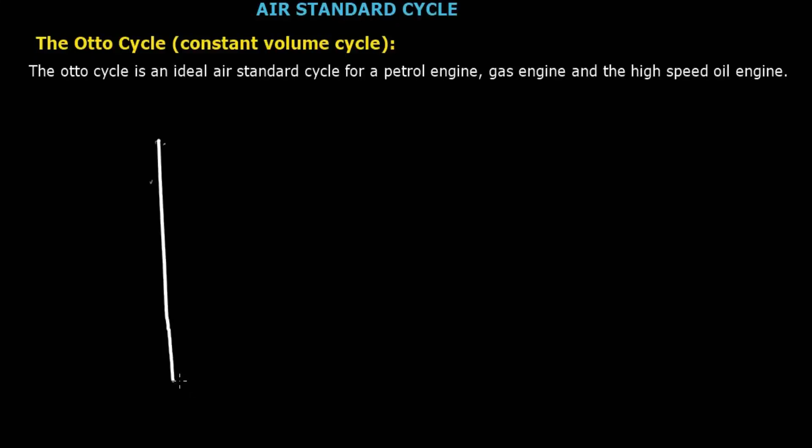And then we draw it this way too. So here is this way, this way, this way, and this way. So here trace it down, and here trace it down too. So this is a PV diagram.

So here is the first, second, third, fourth. So this is V2, which is equal to V3, and V1, which is equal to V4.

Okay, now let's list out the processes involved. So as you can see from the diagram, we have that process 1 to 2 is isentropic compression, okay, as a reversible adiabatic compression. So it's an adiabatic process.

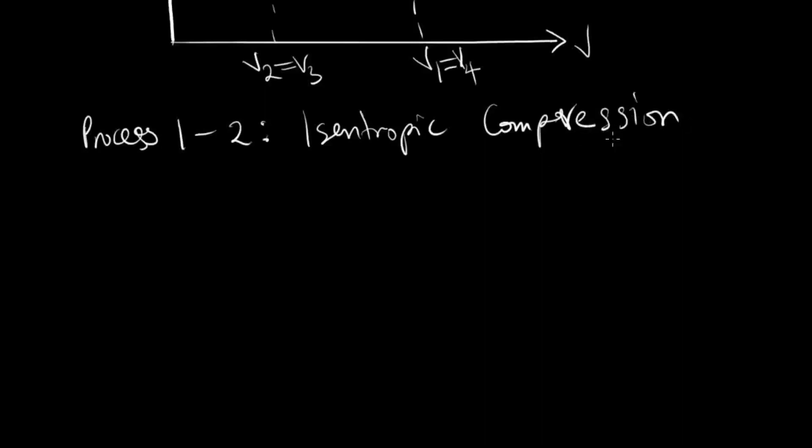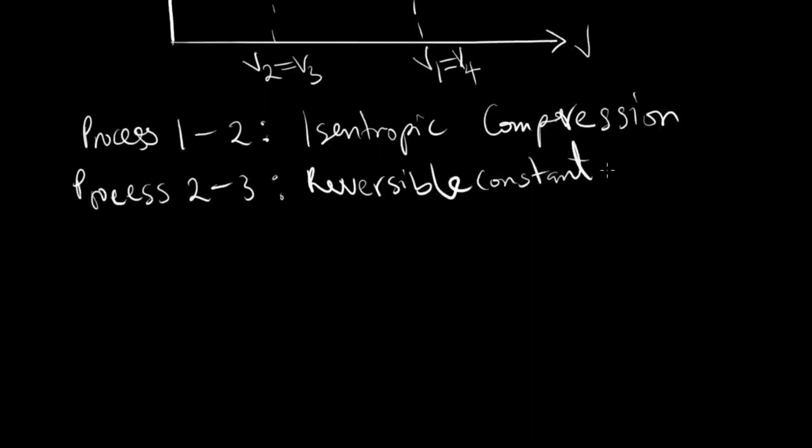So process 2 to 3 is none other than a reversible constant volume heat addition.

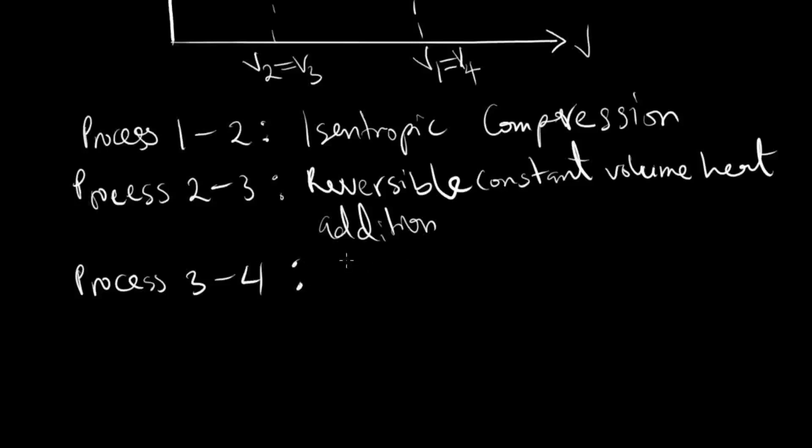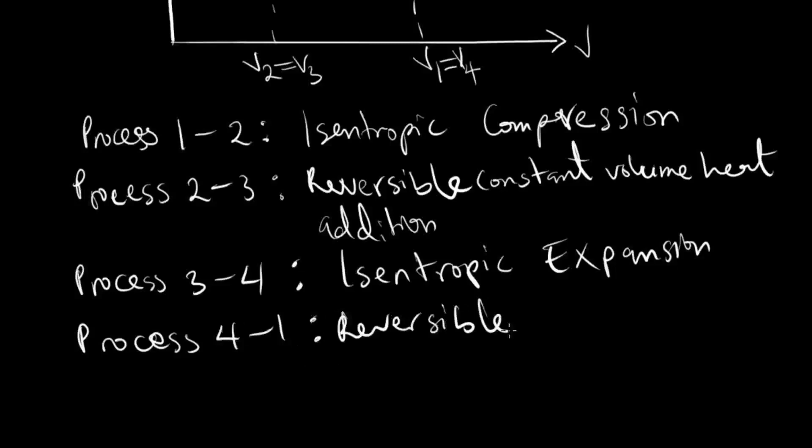So process 3 to 4 is isentropic expansion. Now process 4 to 1 is reversible constant volume heat rejection.

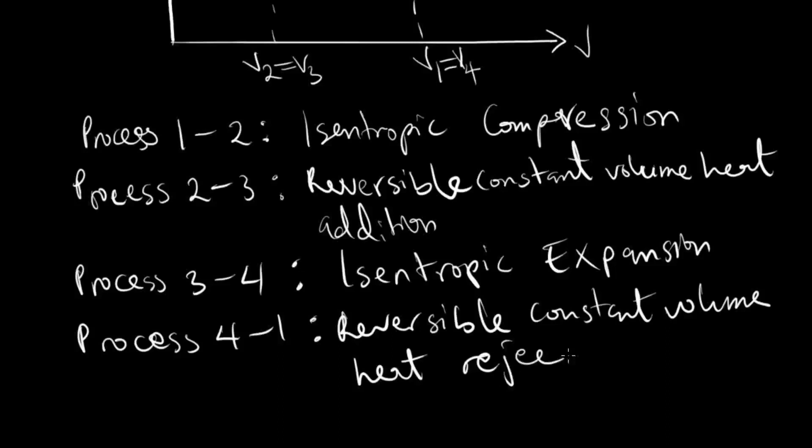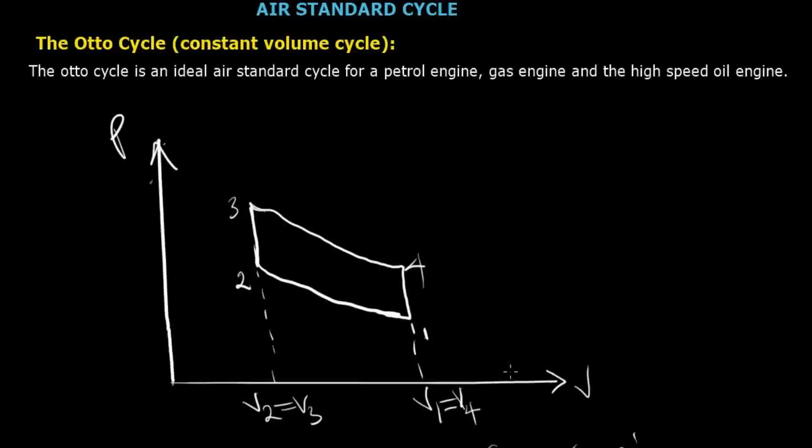Now we have listed out the processes involved in this diagram you can see over here. So these are the processes we are going to follow to be able to solve problems. And before the problems we are going to solve now, we would have to prove some formulas that will help us in finding a solution to some problems.

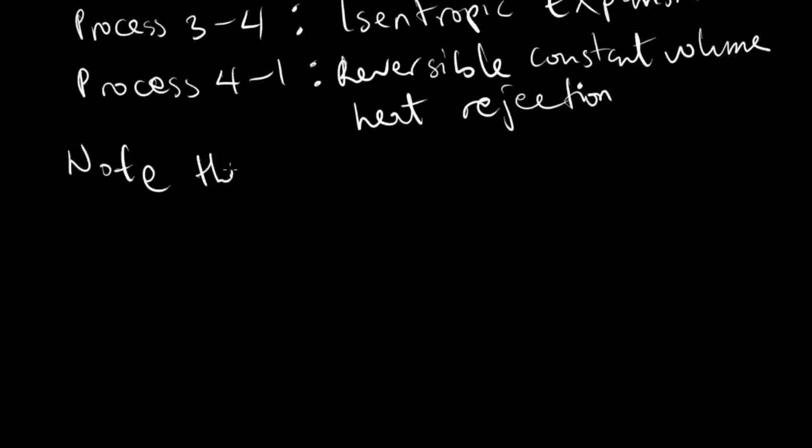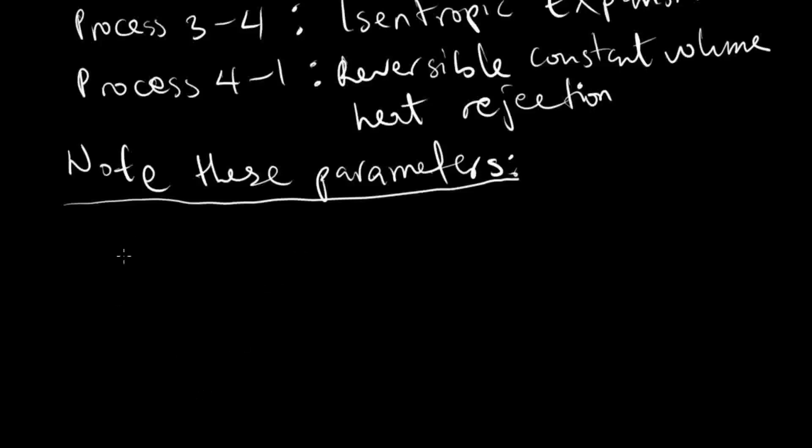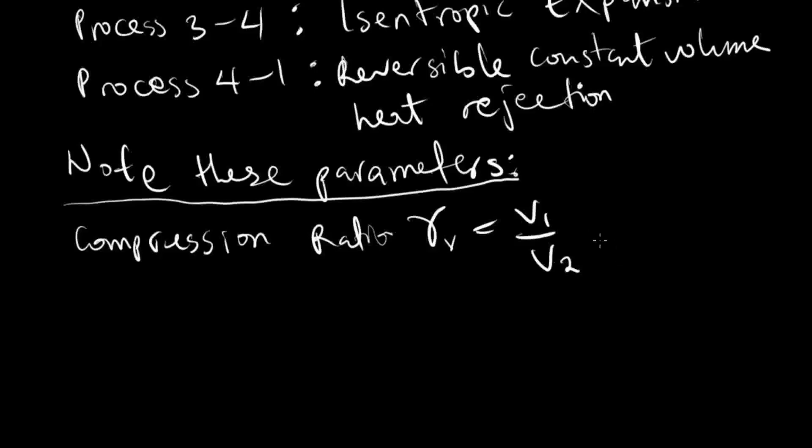So firstly, you have to note these parameters, which are compression ratio. Compression ratio is denoted by R subscript V, which is equal to V1 over V2, and it's the same thing as Vs plus Vc all over Vc, where Vs is swept volume, that's engine swept volume, and Vc is the clearance volume.

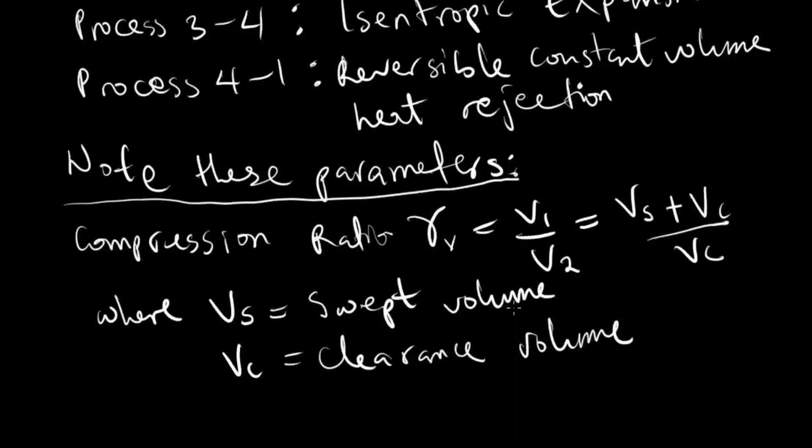Now Vs also, on the other hand, is given by pi d squared L over 4, where d is the cylinder bore, and L is the stroke.

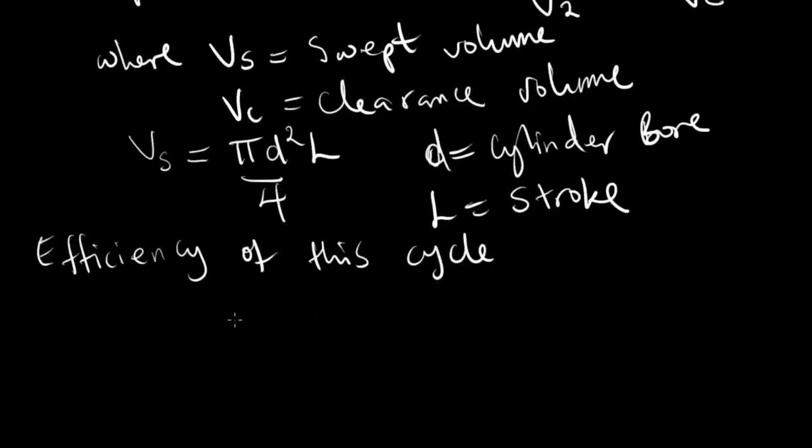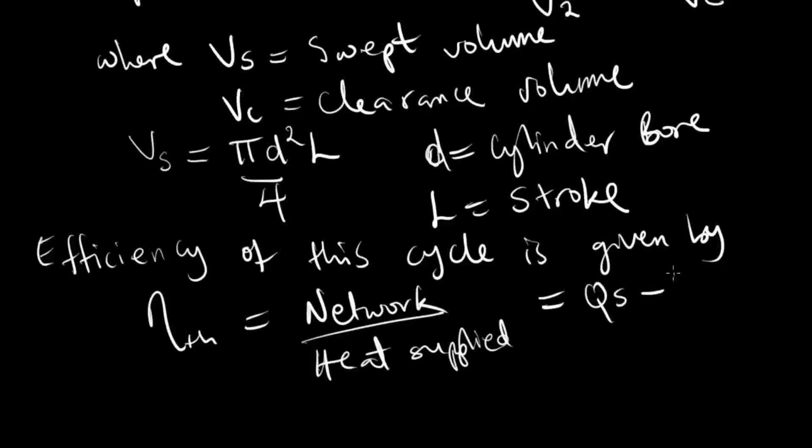Now the efficiency of an Otto cycle is given by the cycle thermal efficiency. Efficiency of this cycle is given by thermal efficiency is network over heat supplied, which is equal to Qs minus Ql over Qs.

Where Qs is the heat supplied, Ql is the heat rejected. Of course, the net work will be once you subtract the heat rejected from the heat supplied, whatever you get is your net work.

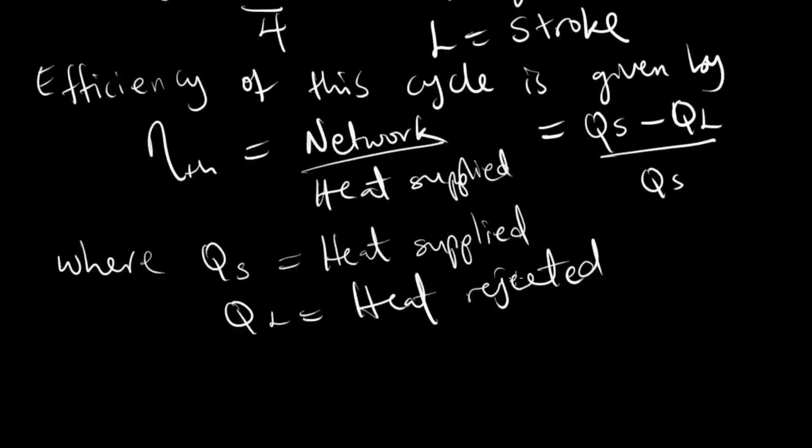So now, following the processes, you will have that heat supplied Qs is given by Cv. I think by now you should know the value of Cv and what Cv is, because we used it in the last video in the non-flow processes. We solved some problems with it, so in case you've forgotten, Cv is the specific heat at constant volume. Then Ql is Cv, T4 minus T1.

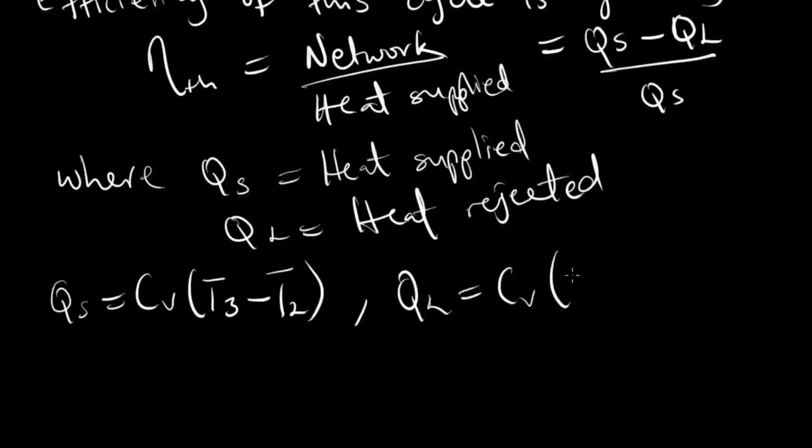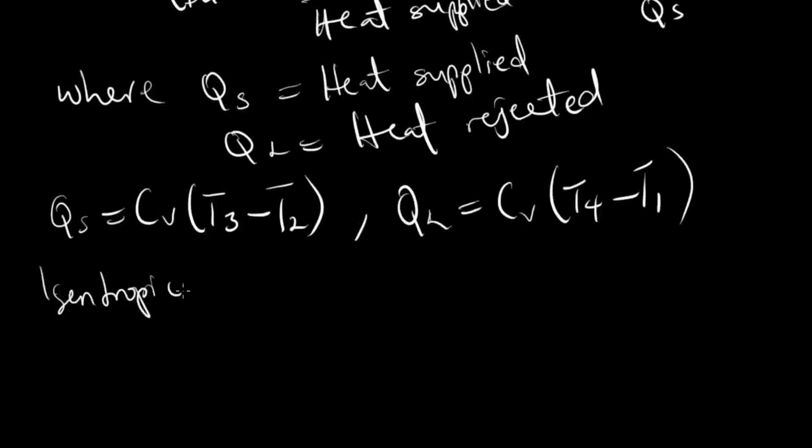Now for isentropic expansion, let's start with the compression. For isentropic compression, T2 over T1, of course, an isentropic process, equals V1 over V2 raised to power n minus 1.

Now for isentropic expansion, we have that T3, which is the maximum temperature, over T4 is equal to V4 over V3 raised to power n minus 1.

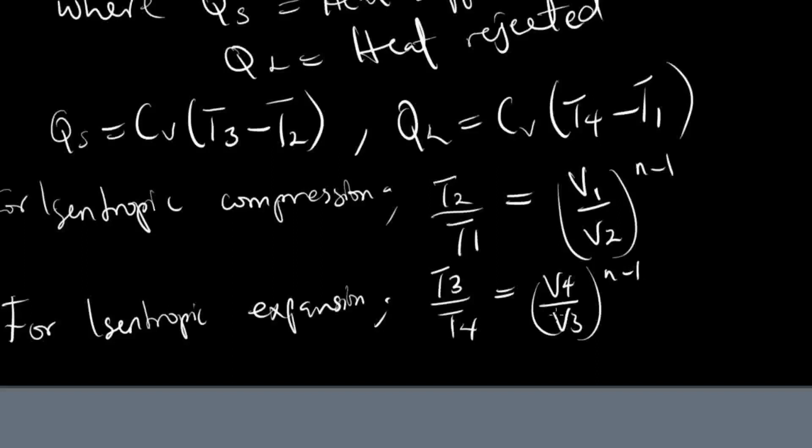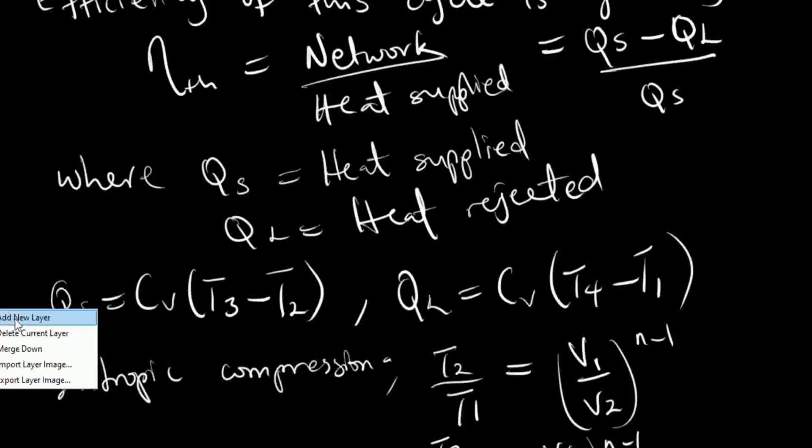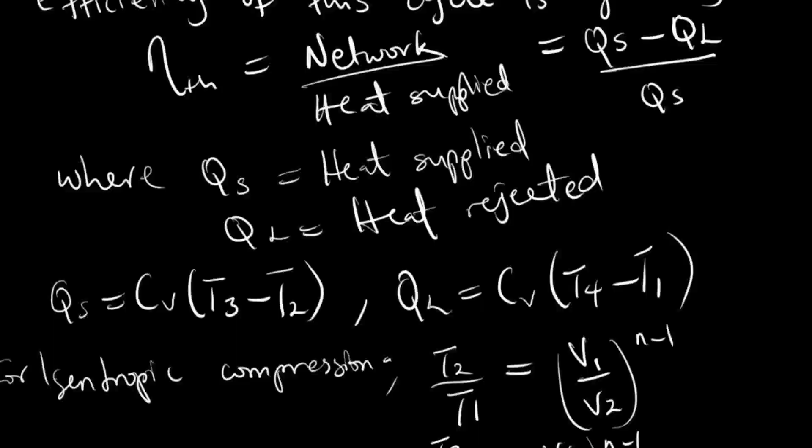So we have come to the end of the page, so we have to continue from this on another page. So I would go to another page. Now, but recall that from the diagram, let's go back to the diagram.

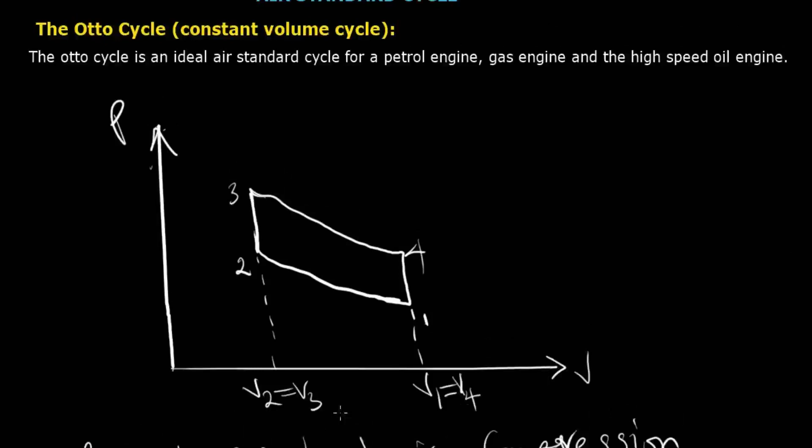So look at the diagram. V1 is equal to V4, okay, and V2 is equal to V3. So if we input that, if you play around with the formula,

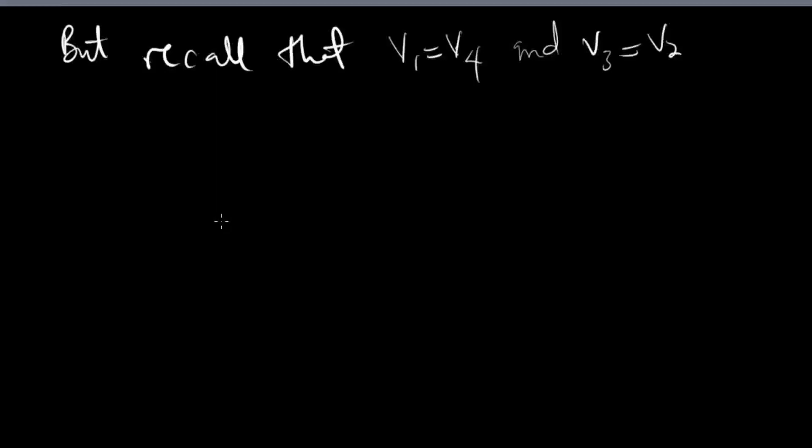We have that. Recall that V1 is equal to V4 and V3 is equal to V2. So that means V1 over V2 is equal to V4 over V3, which is equal to RV, since RV is equal to V1 over V2.

So now, if that be the case, for our isentropic compression and expansion, the formula will look like this. T2 over T1 will be equal to this, which becomes T2 is equal to T1 times RV raised by n minus 1.

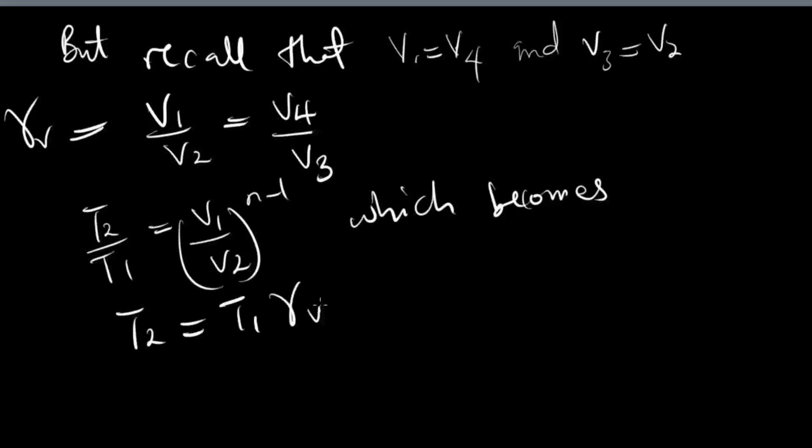Similarly, for the expansion, T3 over T4 is equal to V4 over V3, which becomes T3, which is equal to T4 times RV raised to n minus 1. Now remember that we said cycle thermal efficiency, which is network over heat supplied,

which is Qs minus QL all over Qs, becomes this. Now we know the value of Qs. Qs, just like we stated before, is Cv(T3 minus T2) minus Cv(T4 minus T1), all over Cv(T3 minus T2), since it's a constant volume process, so everything will be CV.

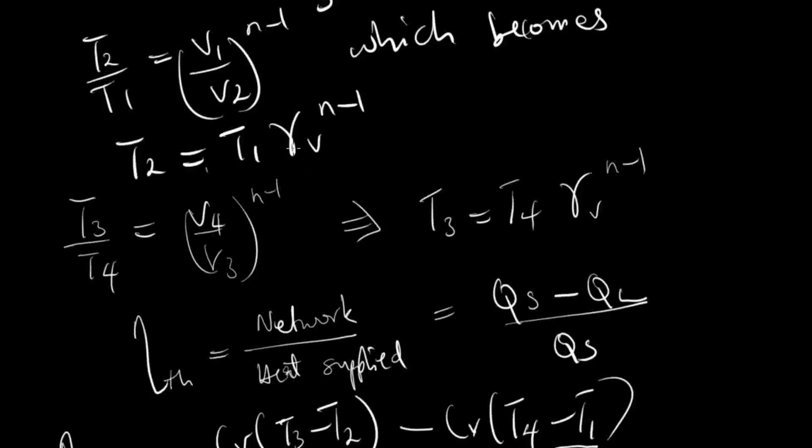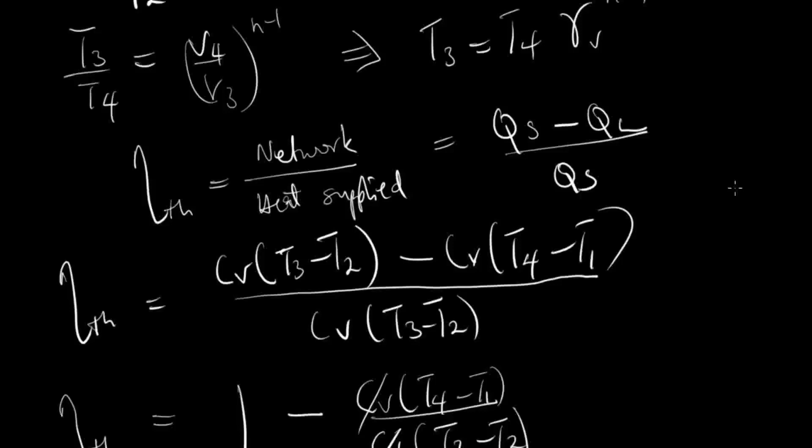But we know the value of T2, which is T1 times RV raised to n minus 1, and then T3 too, same thing. So substituting this into this here, we have that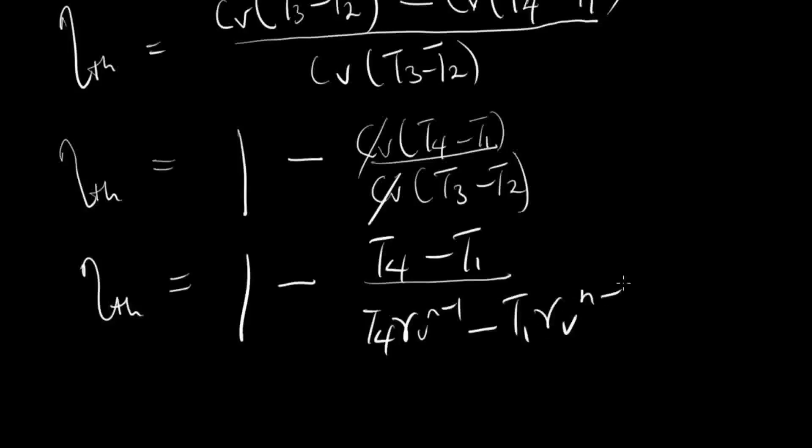efficiency is 1 minus (T4 minus T1) all over (T3 minus T2), where T3 is T4 times RV raised to n minus 1, and T2 is T1 times RV raised to n minus 1. Factorizing T4 minus T1 out, we have T4 minus T1, then RV raised to n minus 1.

So finally, the efficiency of an Otto cycle is given by 1 minus 1 over RV raised to power n minus 1. So we are going to be using this to find our efficiency.

Note, this applies only and only if n is equal to 1.4 generally, because they might ask you a question, and in the question they might give you different values of n at compression and at expansion. In that kind of situation, this formula is not applicable. Rather, you go straight to network over heat supplied, and then you get your answer.

Okay, now having said this, let's take an example of that same question and see how it goes. Let's take the example now. Yes, there we go. It's here.

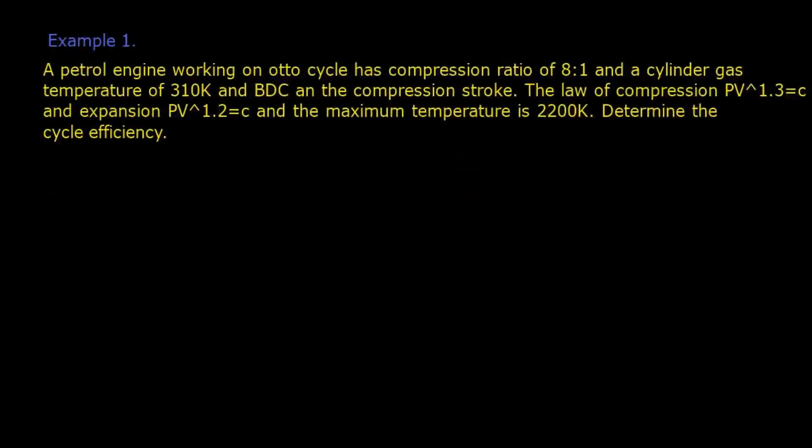Example 1. A petrol engine working on an Otto cycle has a compression ratio of 8:1 and a cylinder gas temperature of 310 Kelvin at bottom dead center of the compression stroke. The law of compression is PV raised to power 1.3 equals C, and expansion PV raised to power 1.2 equals C. The maximum temperature of the cycle is 2200 Kelvin. Determine the cycle thermal efficiency.

So this is a typical example of what I said in the previous page when I was emphasizing the general formula for the Otto cycle. Here we can't use that because N, the compression and expansion index, are not the same. So let's see how it goes.

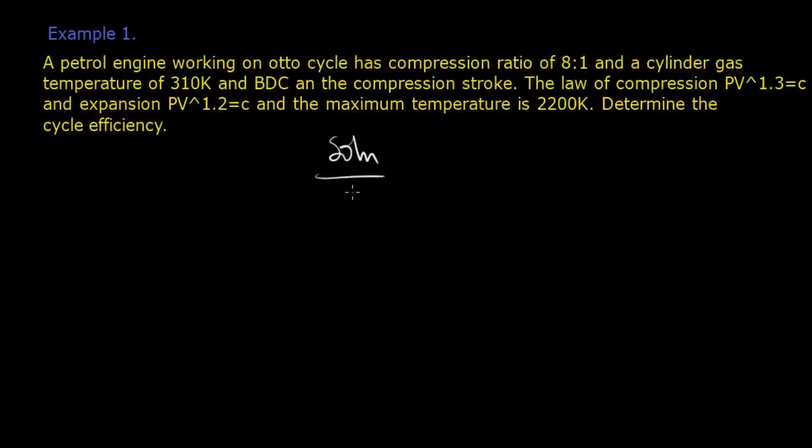First and foremost, you know what we do first. In case you don't know, we write our parameters given. So, solution: parameters given. We have the compression ratio RV, which is equal to V1 over V2, as 8. We have the inlet temperature 310 Kelvin.

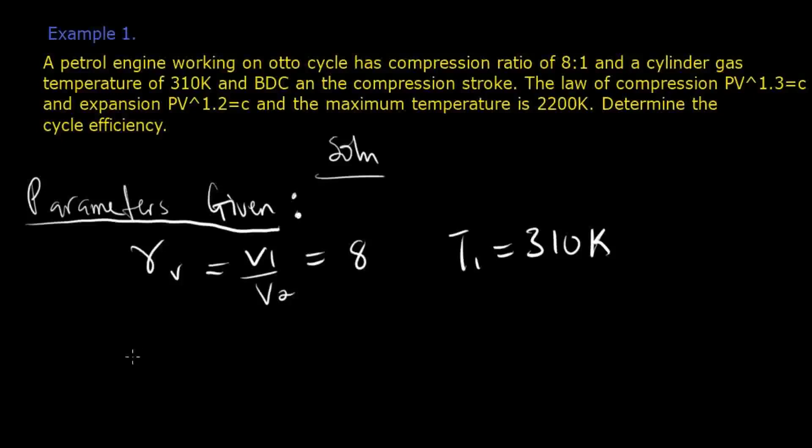Now let's write down the processes. Of course, do I really need to redraw the diagram? Okay, let's redraw the diagram. Diagrammatically, it will look like this.

Okay. You don't really need to be an architect, just place it this way, and there you go.

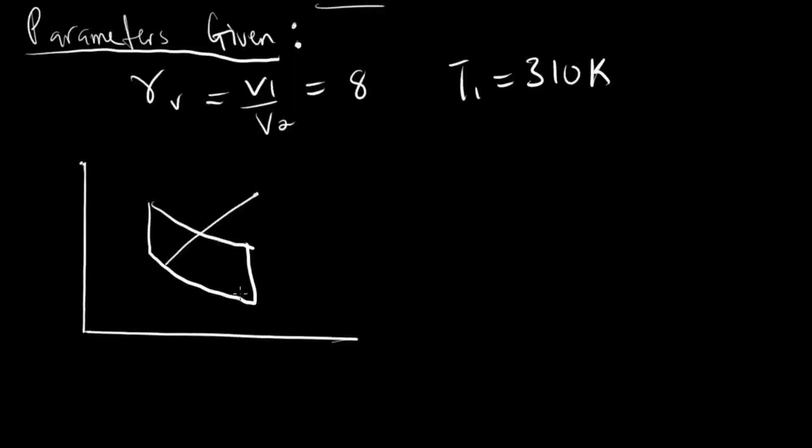So we have this, we have this, we have this. This is PV raised to power 1.2, and this is PV raised to power 1.3. 1.3 equal to C, equal to C. This is 1, 2, 3, 4. Here V1 is equal to V4 as usual. This is your PV diagram. Here V2 is equal to V3.

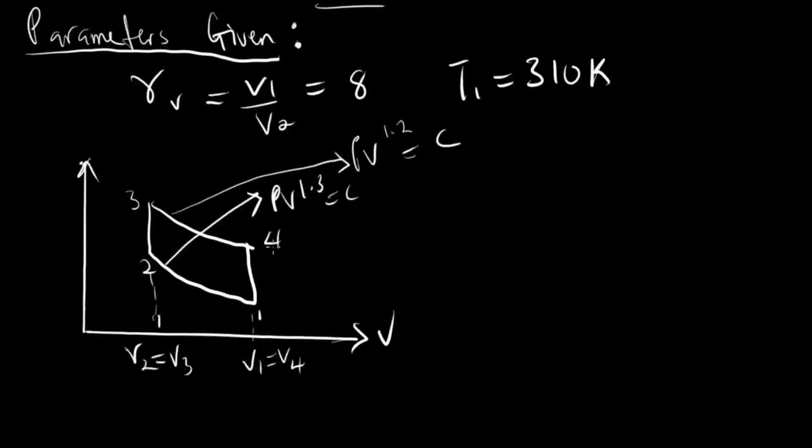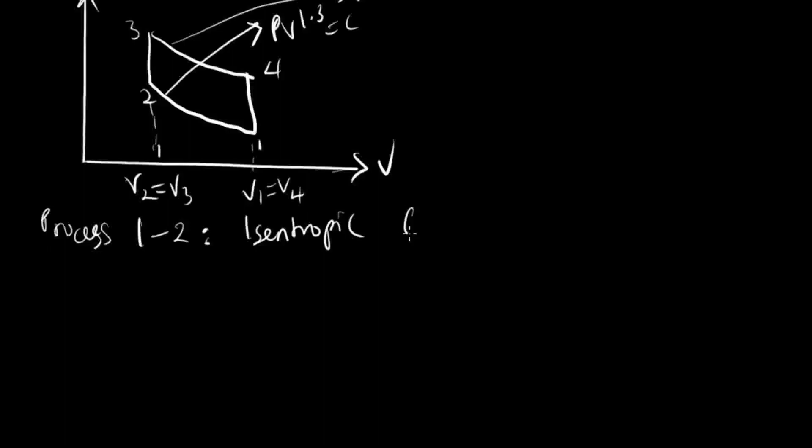Alright, now for our processes, in case I didn't name the processes, of course I did. When I was explaining the PV diagram, we listed the processes involved, process 1 to 2, which is the isentropic compression.

Okay, now since we don't have pressures, P1 V1 raised by n is equal to P2 V2 raised by n, but we are not given the pressures, so rather we go straight and say T2/T1 is equal to V1 over V2 raised by n minus 1. So of course this becomes T2 is equal to T1 times RV raised to n minus 1.

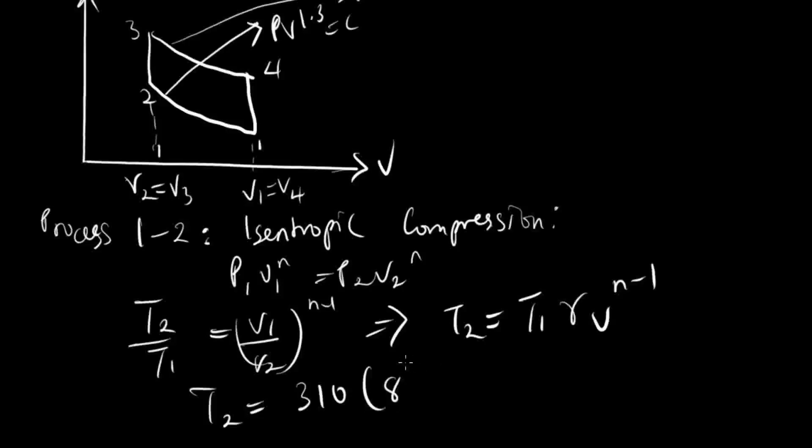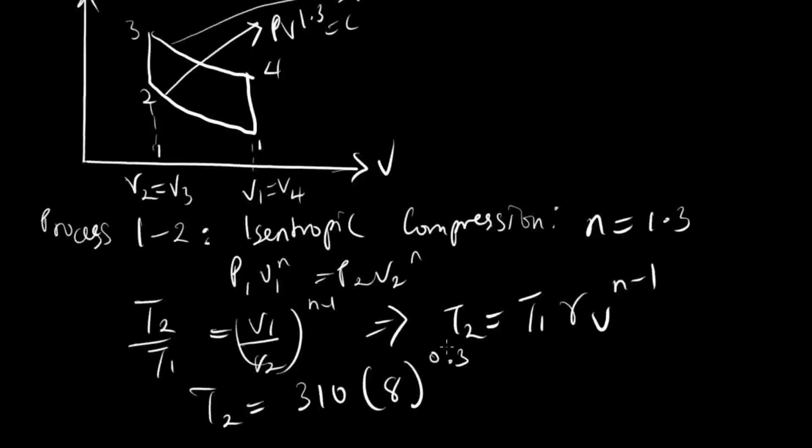So T2 now will be 310 times 8 into, remember, n is 1.3 here, so here will be 0.3, that's n minus 1. So finally T2, after much calculation, we have it as T2 equals 578.5.

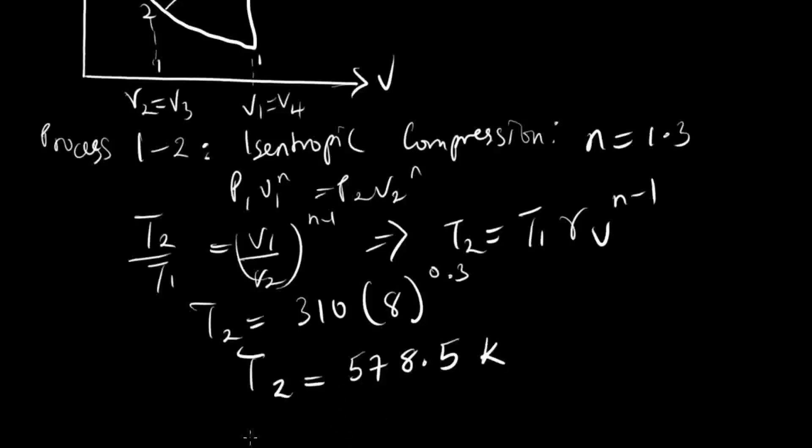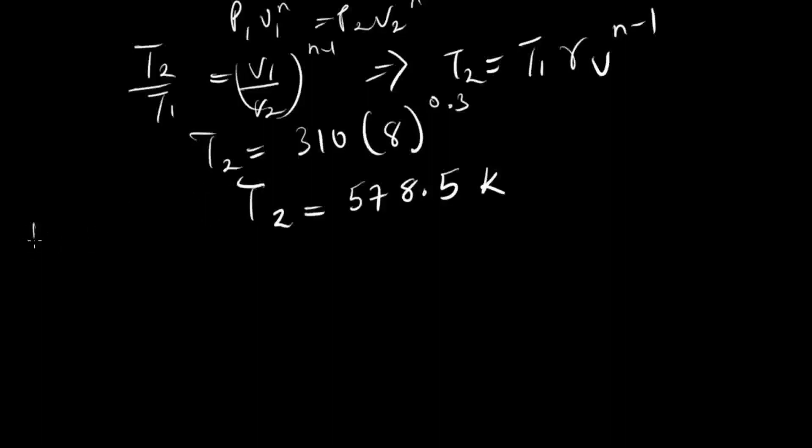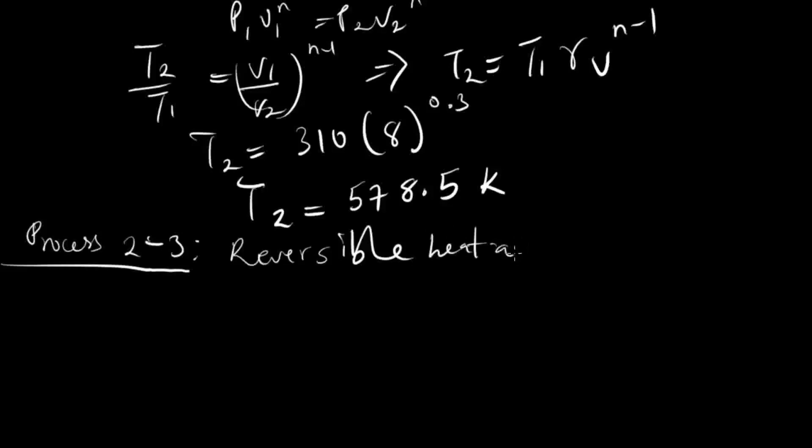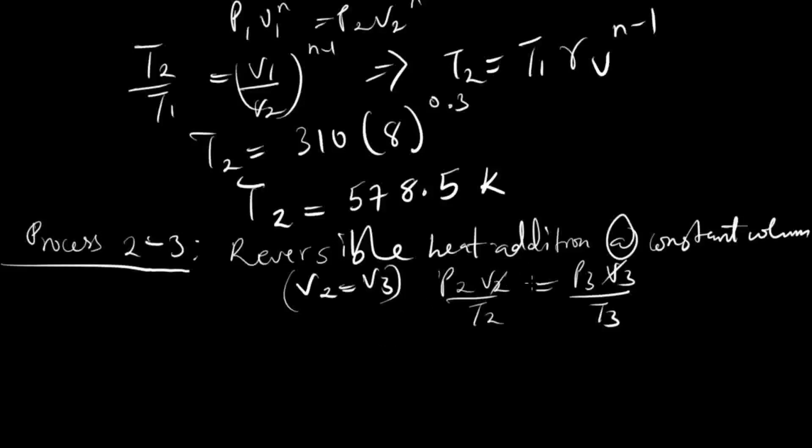So the next process is process 2-3: reversible heat addition at constant volume, meaning V2 is equal to V3 at this process. So from the general gas law, P2 V2 over T2 is equal to P3 V3 over T3. V2 cancels, I have this. So still here we don't have pressure, so we aren't going to use this.

So we go to the next process, that's process 3-4. Process 3-4 is the isentropic expansion. So here we have that T3 is equal to T4 times RV raised to power n minus 1. Of course, you already know how we got that too.

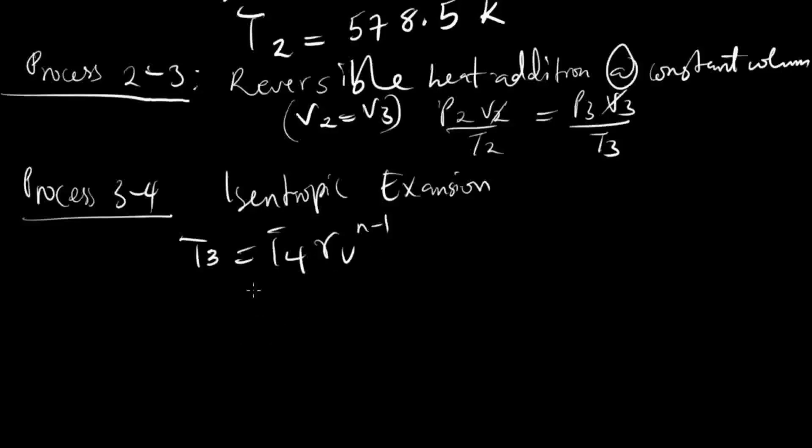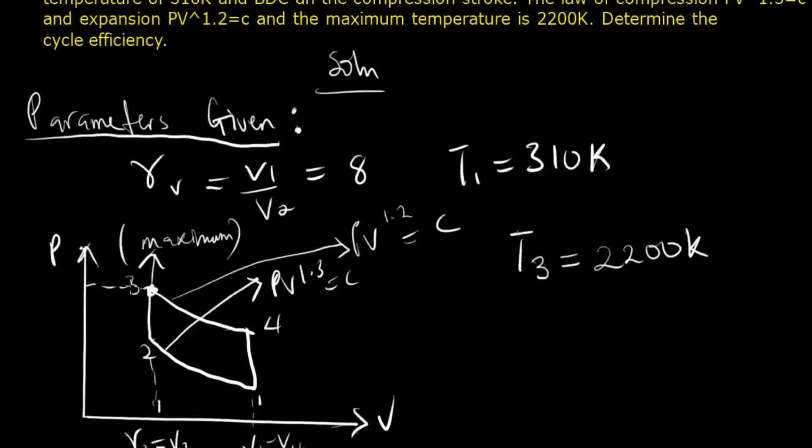Yes, that reminds us that in our parameters given, the maximum cycle temperature is T3. Why T3? Because if you check here, this is P, the temperature at this point is higher than any other point here. So this is the maximum. So our T3 is that.

So finally our T4 will be 2200 over 8 raised to power 0.2. Why? Because at this process n is 1.2, so T4 will be 1451.46 Kelvin.

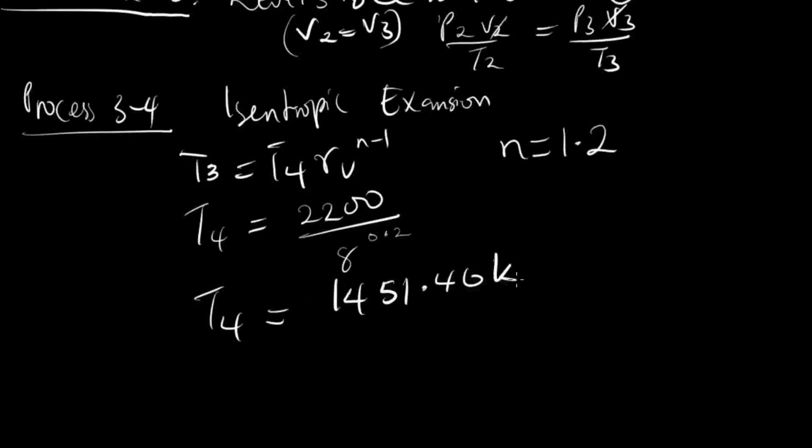Alright, so it goes straight to the question. It said calculate the cycle thermal efficiency. So cycle thermal efficiency is given by network over heat supplied. So network is the net heat over heat supplied. And of course, once the formula is reduced, we have 1 minus T4 minus T1 over T3 minus T2 times 100%.

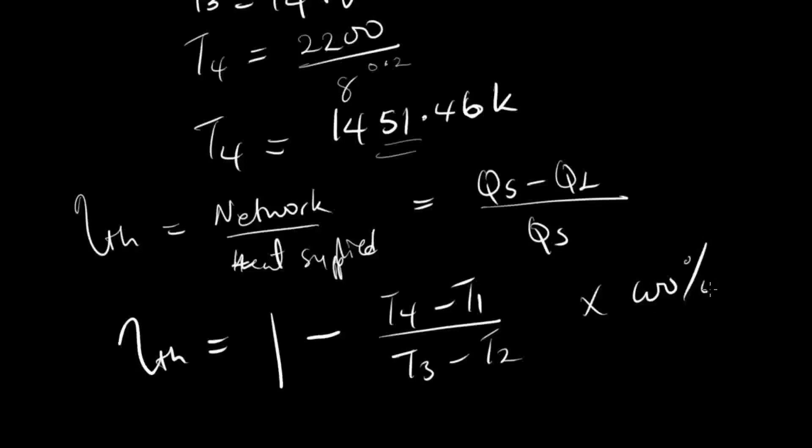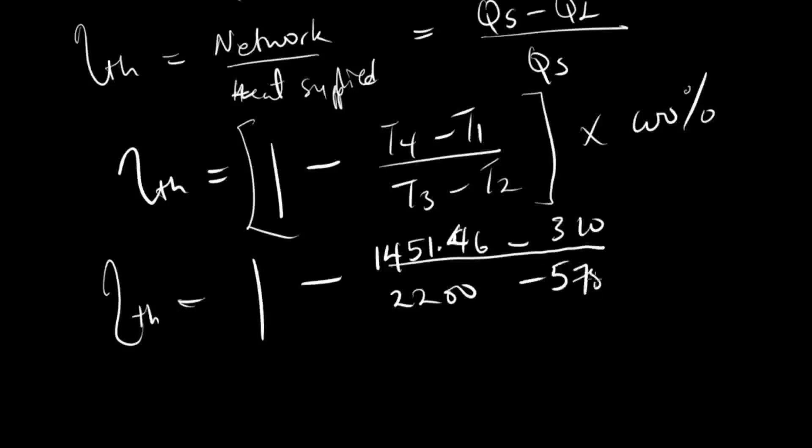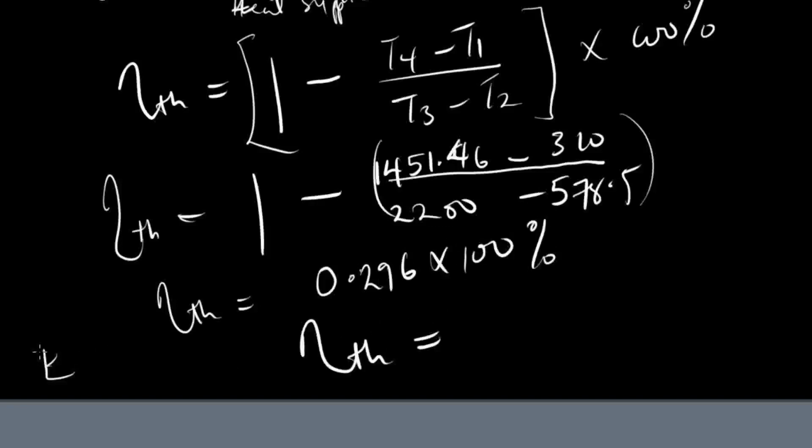So inputting the values of the temperatures, we have that 1 minus T4, which is 1451.46 minus 310, all over T3, 2200 minus T2. So doing this, we have that finally this is 0.296 times 100%. So efficiency is 29.6%.

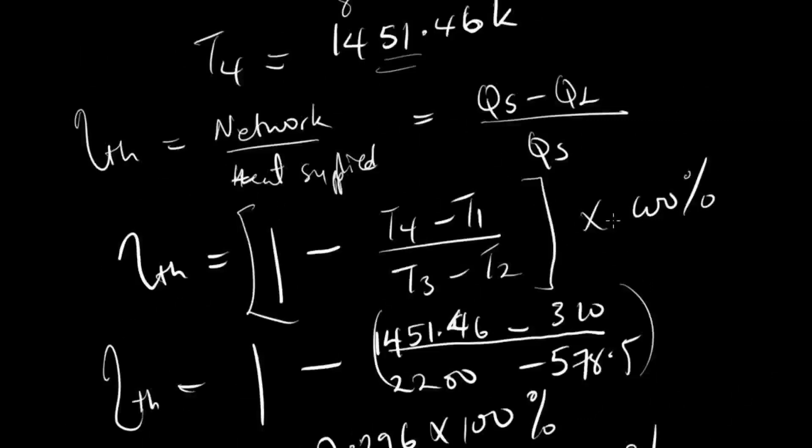So let's take another example to elaborate the facts, or to pinpoint and note the general facts for using the general formula 1 minus 1 over RVN minus 1, because we do not use it here. Why? Because the compression and expansion index were not the same. So let's take an example of when we have the same compression and expansion index.

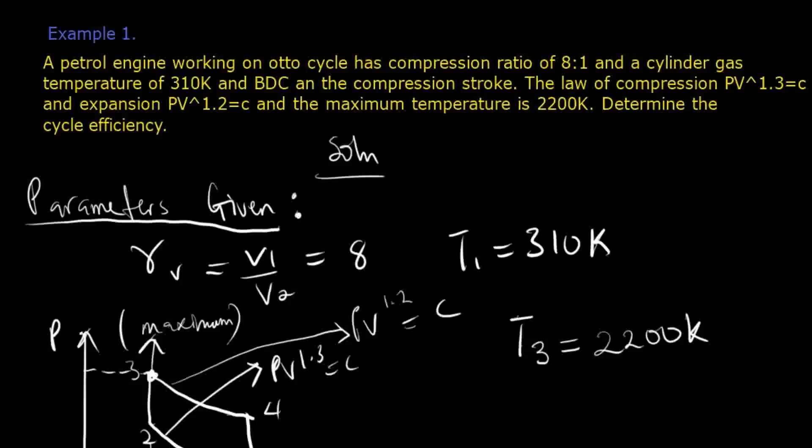So straight to the top, we'll go over to the next example. Now example 2: An engine works on the constant volume cycle. It has a bore of 80 millimeter, stroke of 85 millimeter. The clearance volume of the engine is 0.06 liters. Then the actual thermal efficiency of the engine is 22%. Determine the relative efficiency of the engine. Take N as 1.4. So as you can see here now, the N is general both for the expansion process and the compression process. So let's get down to work.

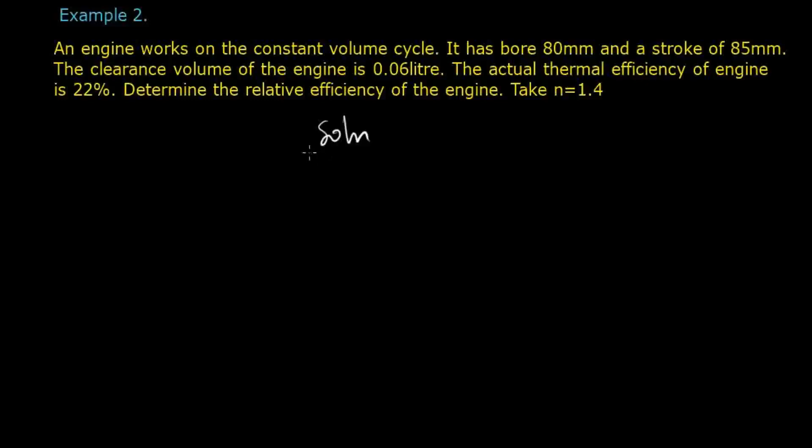Of course, the first thing is writing down your parameters. So parameters given: we have the bore, which is D, as 80 millimeters, stroke L 85 millimeters, clearance volume VC 0.06 liters.

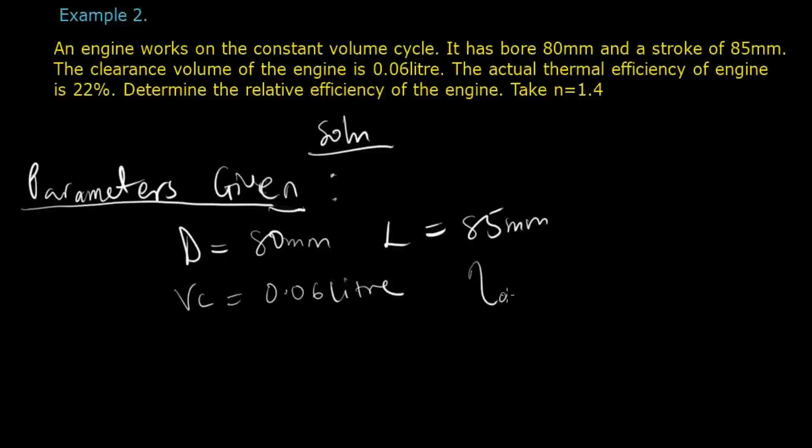What else? Actual thermal efficiency, so actual is 22%.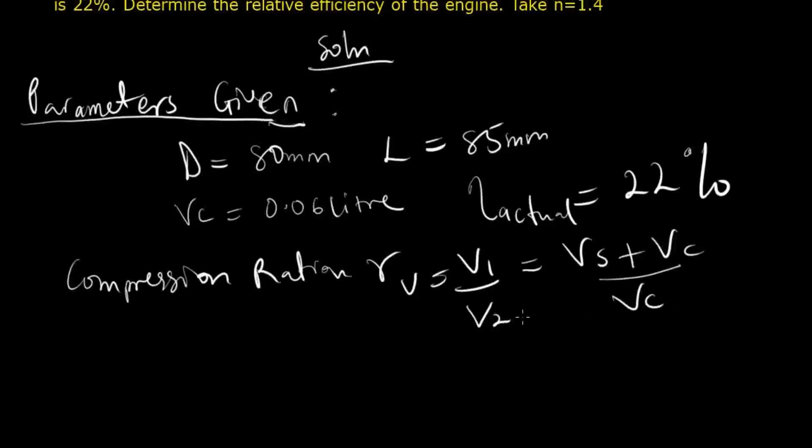Now recall that when we were proving and defining the terms in the first page of the Otto cycle, I said that the compression ratio is given by RV, which is V1 over V2, and is equal to Vs plus Vc over Vc, where Vs is the swept volume, given by pi d squared L over 4.

Now calculating, what is the value of D? 80 times 10 raised to power minus 3, squared. Of course it's in millimeters, but we work with our basic unit, so it has to be converted. 85 times 10 raised to power minus 3, that is the stroke, over 4.

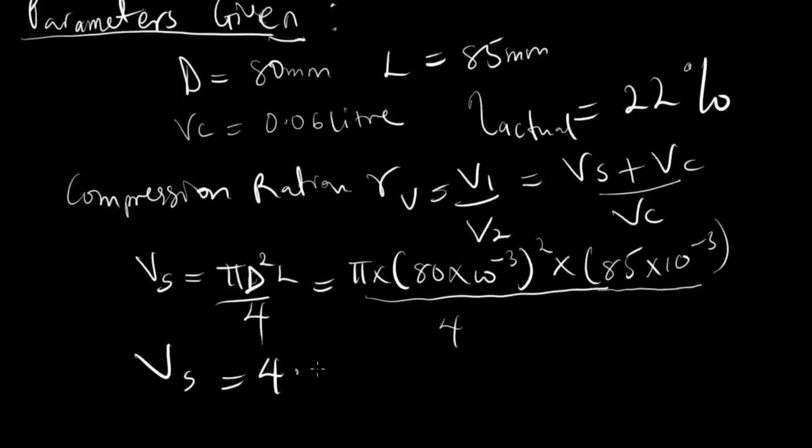Okay, so Vs finally will give us 4.2726 times 10 raised to power minus 4 meter cube.

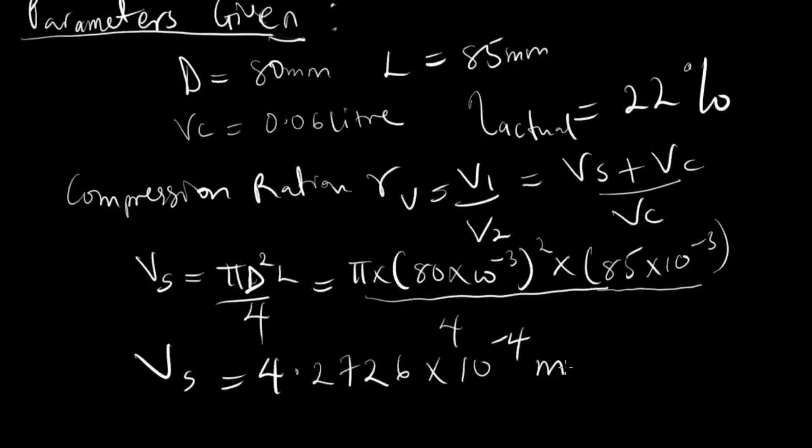Now Vc was given in the question as 0.06 liter, but liters, we don't work in liters. We work in the basic unit. So how do we convert this to meter cube?

Recall from our basic knowledge of unit conversion that 1 liter is equal to 1000 cm cube. So in place of liter I will write this. So Vc is 0.06 times 1000 cm cube, which gives Vc as 60 cm cube. But that doesn't end here, it's still in cm cube. So converting this to meters, we have 60 times 10 raised to power minus 6 meter cube, by dividing 60 over 1 million. So that's it, we have converted everything to the basic unit.

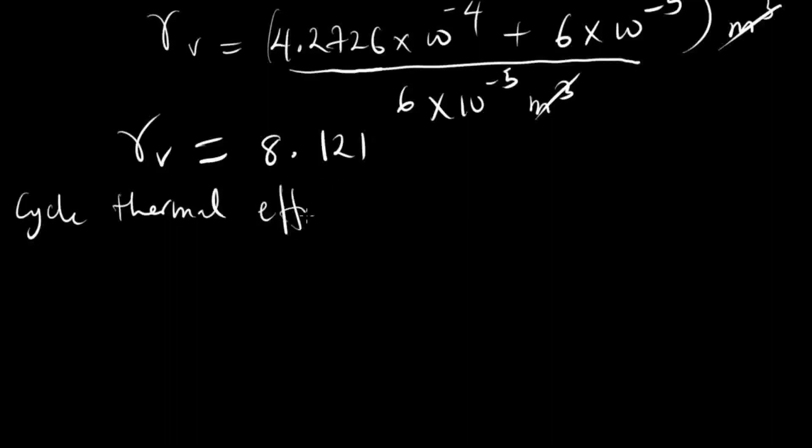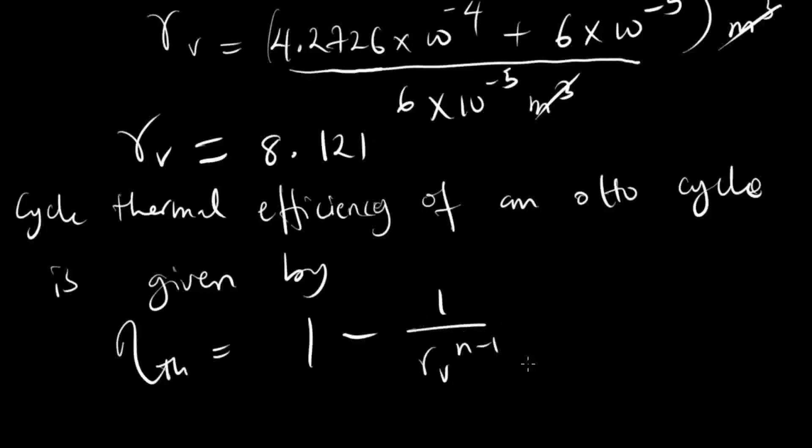So the cycle thermal efficiency of an Otto cycle is given by 1 minus 1 over RV raised to the power n minus 1. Now inputing the value of RV that we've gotten, we have 1 minus 1 over 8.121 raised to the power 1.4 minus 1. So finally we have that this is 56.73%.

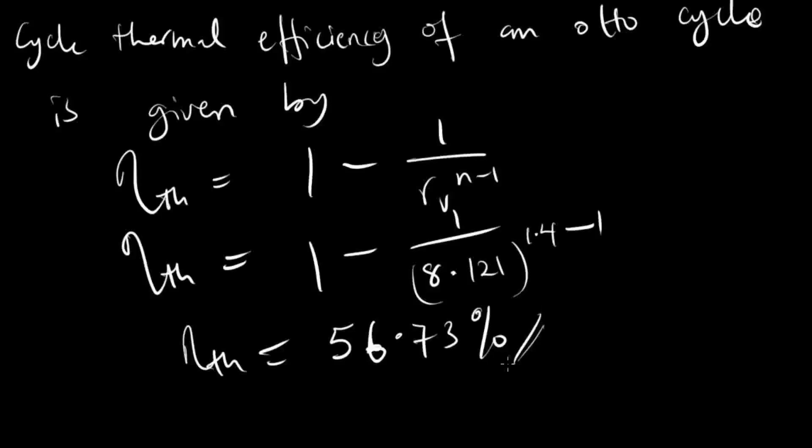That doesn't end here. They didn't just ask us to calculate the cycle thermal efficiency, they asked us to determine the relative efficiency of the engine. So relative, just like relative density of something over density of water, this will be efficiency of something over efficiency of the system. So this is how we are going to write it.

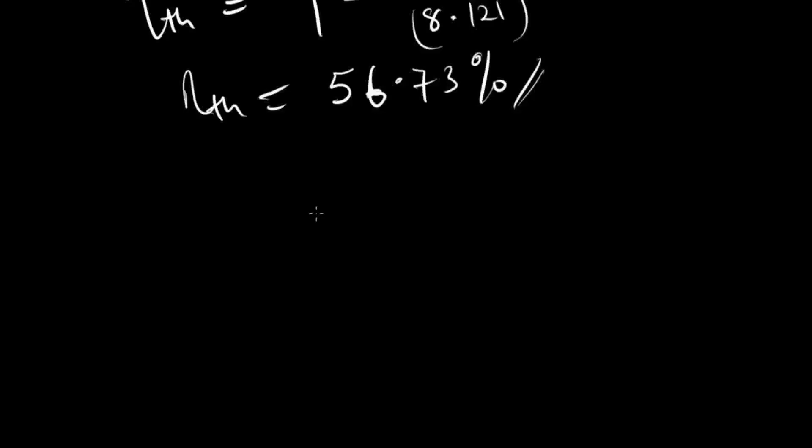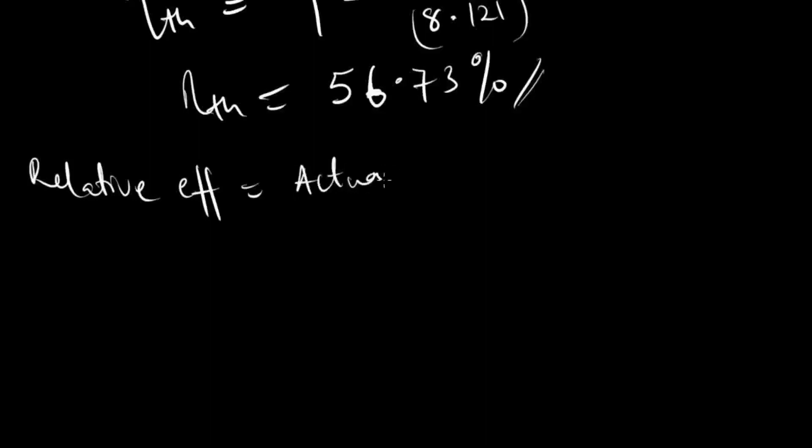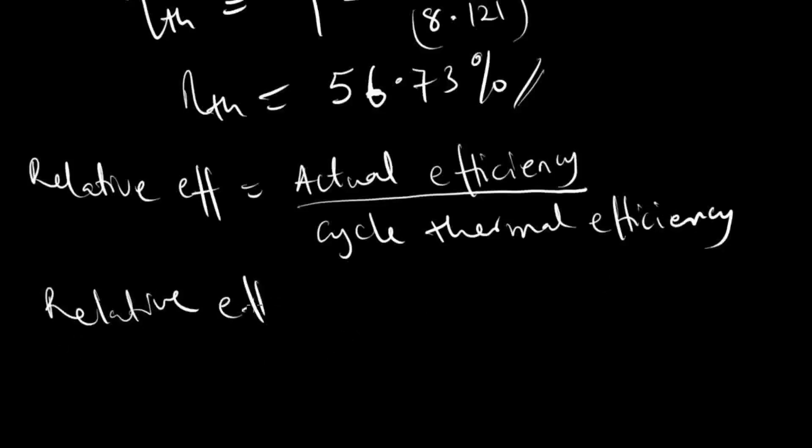Relative efficiency is actual efficiency over cycle thermal efficiency. So the relative efficiency now, they gave us that the actual efficiency is 22%, and cycle thermal efficiency is 56.73%. So relative efficiency is now what?

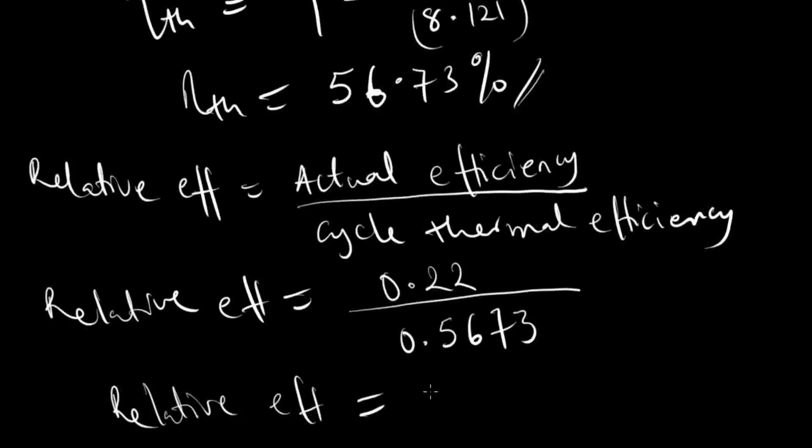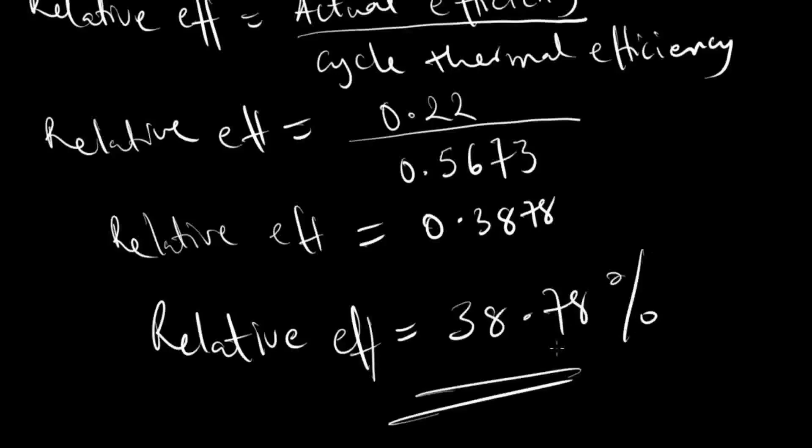0.3878, which means that the relative efficiency is 38.78%. So we've gotten the relative efficiency just like the question stated.

So this is it. It's not difficult, just like the other processes. Just follow the process one after the other, and also follow the parameters the way I've given.